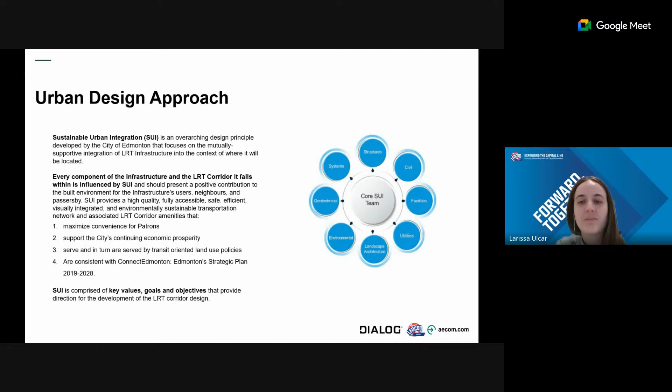You might have heard this term in industry before, maybe not, but Sustainable Urban Integration, or SUI, is an overarching contractual design principle that helps guide all design and construction decisions on this project. It was developed by the City of Edmonton in 2012, and quite simply put, SUI reimagines traditional transit design. Instead of focusing solely on function, getting passengers A to B as fast as we can, SUI allows us to shift conversations and elevate the importance of considerations such as environmental preservation, neighborhood and pedestrian-friendly design, placemaking, passenger comfort and safety, as well as transit-oriented design.

You might have seen in the submission contents that SUI can be further broken down into 4 key values, the first of which is pedestrians first. Although it's not limited to just passengers or users of the LRT system, it's important that the corridor and infrastructure contribute to a multimodal way of life for all users. The second is sustainable; we're striving to minimize the impact of the new infrastructure on its surrounding environment. Third, we've got flexible and adaptable, recognizing future short-term and long-term potential influences and their impacts and implications. Lastly, we have integrated: we're committed to providing a seamless environment where all components are designed and located to support cohesive, holistic design intent while allowing for unencumbered access of the corridor. Each of these values can be broken down into more tangible, interconnected goals and objectives.

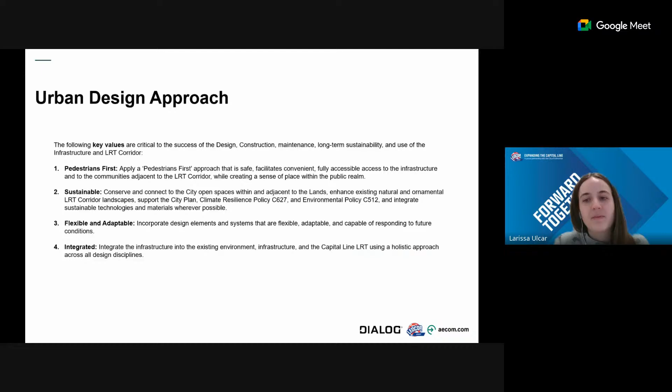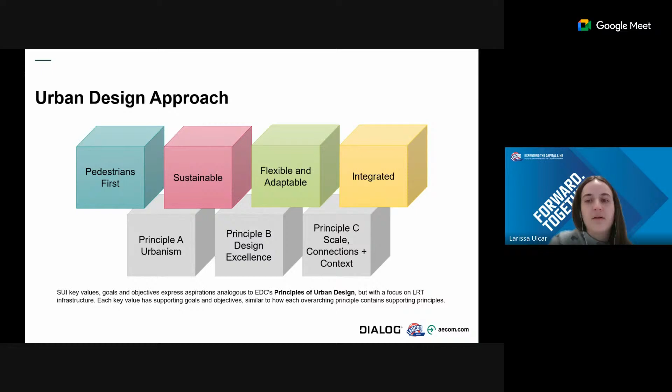We believe there are a lot of synergies between Sustainable Urban Integration and EDC's principles of urban design. The 4 key values can be broken down into 6 goals and further into objectives. Urban design has 3 overarching principles and 11 supporting principles. The key difference is that SUI allows us to tailor conversations and focus on LRT corridors and infrastructure.

The LRT corridor is the first real topic of today's presentation. The intent is to focus on the transportation network and connectivity along the multimodal corridor. We plan to get more into the details of SUI and user experiences, including character zones and pedestrian priority zones, in our 5th and final formal presentation to EDC.

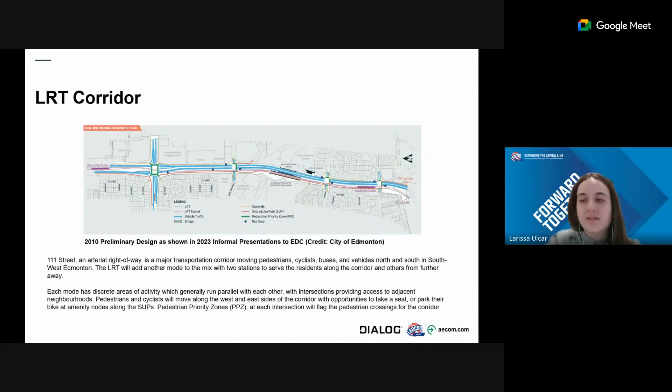Big picture, the majority of the alignment you see here is along 111th Street. The LRT will run in a dedicated or segregated corridor that parallels a lot of the other modes you see. For the most part, we are maintaining the existing vehicular traffic configuration, both in numbers as well as the pedestrian and cyclist movements.

If you couldn't see anything on that previous screen, we thought we'd zoom in a bit to allow everybody to appreciate some of the details. Just keep in mind where you see that north arrow pointing, because the orientation does change. Right now, north is to the left.

Starting with LRT, shown here in purple, we tie into the Century Park Station at grade, within the median between the two roadways. We actually use the 23rd Avenue underpass that travels below the 23rd Avenue intersection to skew the LRT diagonally so it can transition to the west side of 111th Street.

All the SUP connections on the maps are shown in orange. We're going to tie into the existing network along the west side of 111th Street. There's an existing pedestrian bridge connection to Century Park Station that we're closely tying into. SUP users will have to cross 23rd Avenue at grade and continue their journey south of the intersection, where they'll be between the tracks and the existing property fences. Sidewalk connections are limited to the east side of the intersections and roadways, mimicking a lot of the existing conditions you see today.

Heading a little further south, the LRT surfaces again around 20th Avenue, where we run at grade along the west side of 111th Street, with the exception of Blackmud Creek Ravine, where we have to elevate. The SUP, as I mentioned, is again on the west side of the tracks, up until the south side of Saddleback Road and 19th Avenue intersection.

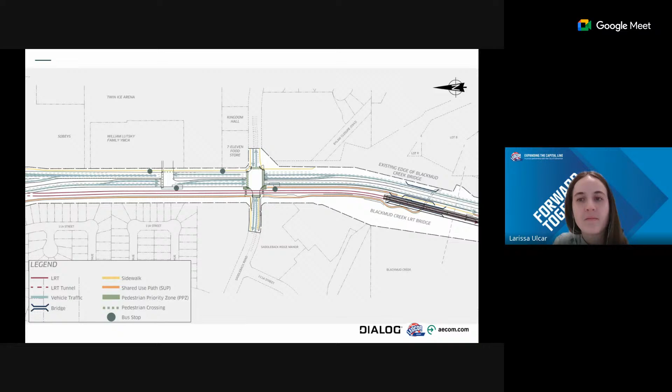South of Blackmud Creek, the LRT continues again at grade along the west side of 111th Street. This is where we have our first station, Twin Brooks Station, just north of 9th Avenue. The SUP continues between that roadway and trackway configuration up until 9th Avenue, at which point users will have to cross 111th Street and continue south along the east side of the roadway, allowing them to use the existing roadway bridge over Anthony Henday Drive.

The sidewalk here is quite disrupted in some ways, where we just have east-west movements at the intersections themselves, but that is similar to the existing condition. There's no connection between 12th Avenue and 9th Avenue. I will highlight one improvement we've made as part of maintaining two lanes of traffic and not adding a third lane: we were able to add pedestrian crossings at both 12th Avenue and 9th Avenue along the north sides of these intersections. Previously, we actually just had a south pedestrian crossing in those areas.

Now we're in the less exciting part of the alignment. South of 9th Avenue, the LRT starts to skew to the west as we approach the Transportation Utility Corridor and Anthony Henday Drive. We'll slowly gain elevation through the space, allowing the bridge to cross over Anthony Henday diagonally. This structure is dedicated to LRT; there are no pedestrians through this section. South of the Anthony Henday Drive roadway lanes, we start to transition down and skew west, and the roadway will pass below.

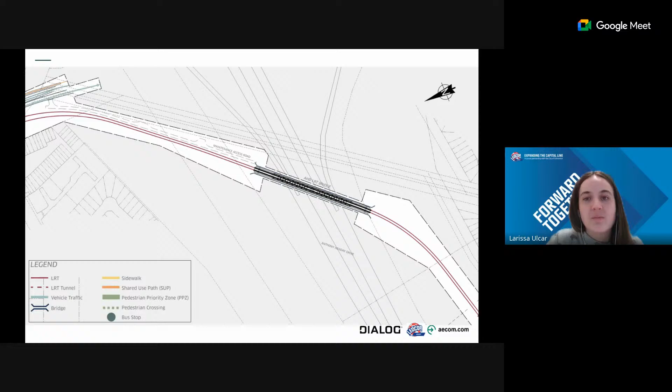Further west of there, we continue with the tracks at grade north of the MacEwan neighborhood, and we start to bend the track south. There is a point at which the track can split into two, allowing trains to enter the Lou Lawrence Operations and Maintenance Facility site, whereas the mainline track continues along the west side of that facility and ultimately brings us to the new terminus of the Capital Line, at Heritage Valley, on the north side of Ellerslie Road.

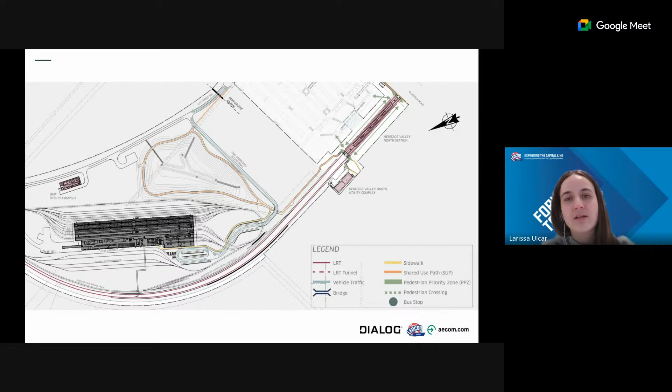The tracks will actually stop a little bit short of there, north of the existing east-west SUP. Folks will enter the Heritage Valley North Station from both the north and south sides of the station. It's a center loading platform. We've got a couple of little SUP connections to allow transfers from the Heritage Valley area to the Lou Lawrence Operations and Maintenance Facility site. There's a storm pond path and then some sidewalk connections to that building. Ultimately, this will be the terminus and will allow for a multimodal corridor hub, enabling transfers with the bus transit center and the park and ride.

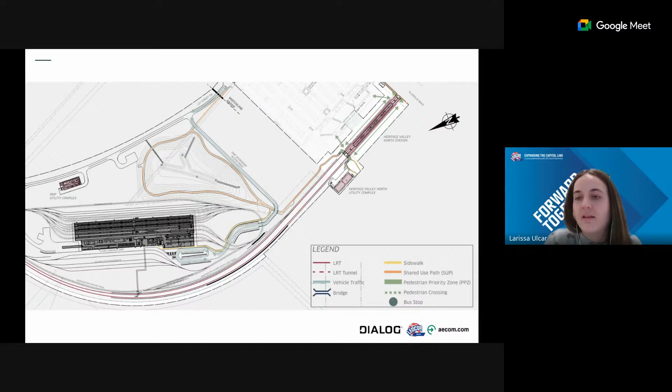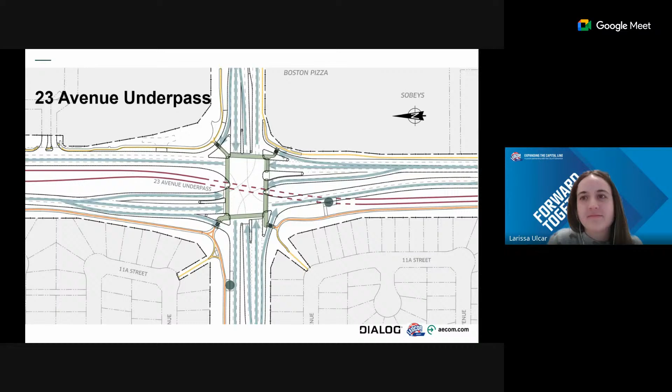So I'll be going through the major transportation structures on the project today. For the first one, the 23rd Avenue underpass, we'll start at the north end of our LRT corridor here, just south of the existing Century Park Station. This is a plan view of the 111th Street and 23rd Avenue roadway intersection. You can see the track alignment shown in purple, and north is facing to the left side of the page.

At this intersection, the city used the crossing assessment framework to determine that grade separation of that LRT alignment, shown in purple, would be necessary. So basically, in the dotted line portion there, the LRT crosses under 23rd Avenue and is buried underneath the intersection. What's beneficial about that is the new underpass will allow vehicles, pedestrians, and cyclists to use the reconstructed intersection in a very similar fashion to the existing, pre-construction condition.

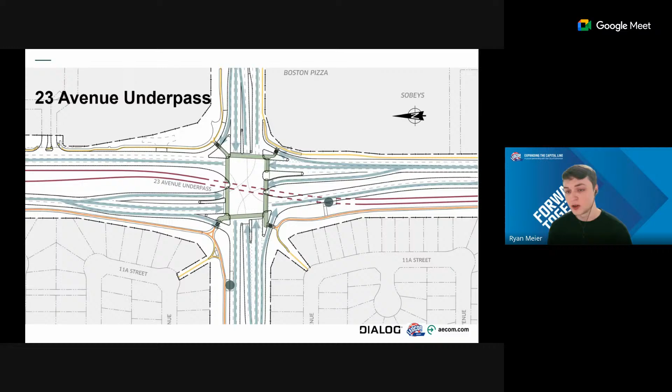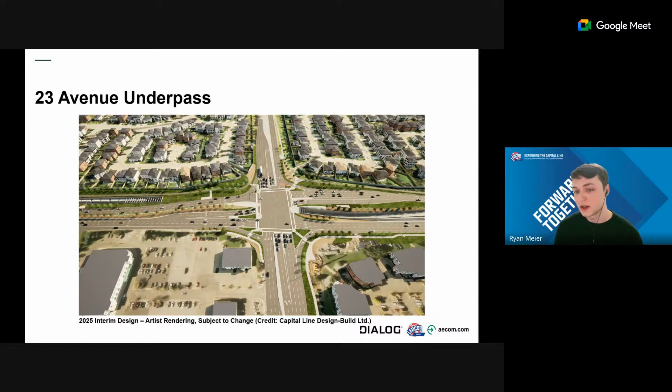So we'll jump into a bit more detail here. This is a rendering of that same intersection, this time with the page flipped, so North and Century Park are on the right side. What we're looking at is a bird's eye view of the intersection. You can really see the open air portal sections on either end, where the LRT transitions from at grade to below grade underneath the intersection. Between those portal sections is the underpass or tunnel portion of the structure, buried beneath the intersection. As Larissa mentioned earlier, this structure shifts the LRT alignment from the median between the 111th Street roadway, where the Century Park Station is, to the west side of 111th Street, where it continues south along the corridor.

So jumping into a more detailed shot here, we're at the north portal this time. These two shots are looking south down the corridor and 111th Street. On the left side we have a bird's eye view, and on the right side a track level view, both looking south.

What you can see in the bird's eye view is the 111th Street roadway on either side. Users driving by this structure will generally see a concrete crash resistant barrier and then the portal fencing on top. The portals rely on concrete struts at the deepest sections right before the underpass starts, providing lateral stability for the structure. On top of that concrete crash barrier we have black Omega fencing, to protect the opening and prevent any fall hazards.

Looking at the image on the right, we're down at track level now. Primarily we have cast in place concrete finishes, with a bit of an exception: durable fire rated insulated facing panels shown there, a little shiny in the image. The exact finish and color is still a work in progress, but these are provided to insulate the structural secant pile walls and provide a uniform finish for users on the train. We're focused on making sure the finish we pick integrates with the surroundings and provides clean, simple lines and seamless transitions between the different materials used here.

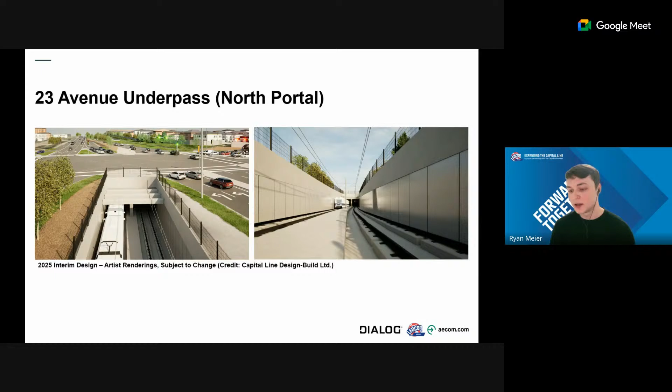Jumping over to the south portal, this is obviously the south side. Now we're looking north down 111th Street and back towards Century Park. Track level view on the left, bird's eye view on the right.

What you can see generally with the south portal is there's a lot more struts, because the transition back to grade is a little more gradual, so that deeper section in the portal exists for longer. It's a little difficult to tell in the image on the left, it's kind of dark, but you can see there is a central wall in the underpass that separates the northbound and southbound tracks. That's a cast in place concrete wall.

Back to the right side, now we're looking at that bird's eye again. You can see the reconstructed shared use path on the west side of the south portal, and the 111th Street roadway on the east side. On that SUP on the west side we are going to have ornamental landscaping and increased pedestrian lighting, which will increase and improve the user experience there. We're using that same Omega fencing shown on the north portal in black.

One thing we are looking at in collaboration with the city and the Edmonton Arts Council is to potentially use that Omega fencing as a public art opportunity and affix some public art there, as it'll be highly visible to people walking by this structure.

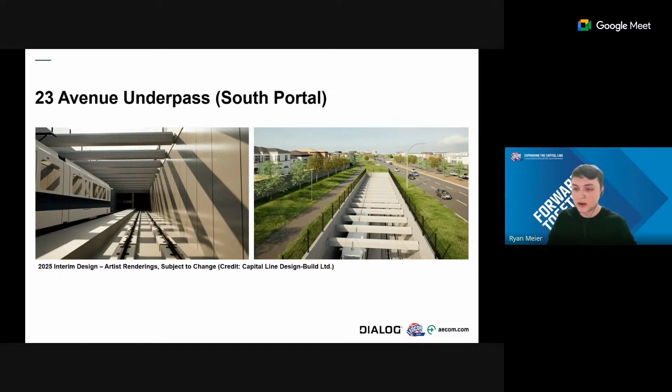So again, heading south down the corridor as we showed earlier, this is the Blackmud Creek LRT bridge, located over the existing Blackmud Creek ravine, approximately halfway between 12th Avenue and 19th Avenue, which is Saddleback Road, just south of the YMCA there.

What we have here are multiple spans over the Blackmud Creek ravine. We are maintaining SUP access below the bridge on the east side of 111th Street, so no reconstruction there. We're reconstructing the SUP, as Larissa mentioned earlier, on the west side of the new LRT bridge and tying into the existing SUP in the ravine. So not too much change for users there. This bridge is going to be offset approximately 5 meters from the existing 111th Street roadway bridge.

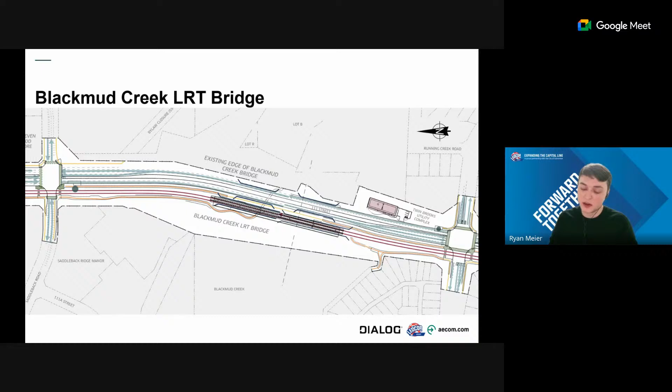Generally we have unpainted concrete finishes for more of a natural look, consistent with other recently constructed LRTs in the city. We have galvanized steel railing on both sides of the deck, to protect LRT maintenance staff. As mentioned earlier, this is a dedicated LRT structure, so no pedestrian activity crossing this bridge. The piers themselves are going to be very similar in size, shape, and finish to those existing piers on the 111th Street roadway bridges.

On the bridge, there's overhead catenary poles, no dedicated light poles on the LRT bridge. So we'll be making some slight modifications to the light poles on the roadway bridge, putting a double davit head on there to provide the trackway illumination required for the LRT structure.

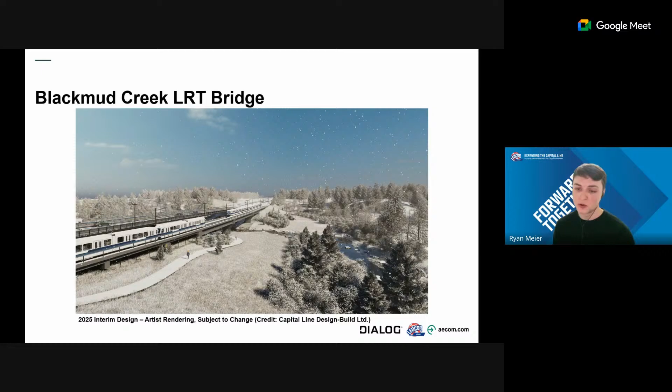Edmonton's obviously a winter city, so here's just a visual of what the structure might look like during some of the more cold months of the year. Really just trying to showcase what some of those finishes might look like in the winter there.

Moving south to our third and final transportation structure, this is the Anthony Henday Drive LRT bridge. Again, a dedicated LRT structure, so no provisions for general pedestrian access across the LRT right-of-way. Within the TUC and Anthony Henday Drive area, we're positioned west of the existing 111th Street roadway bridge, which isn't shown on this plan but is just to the east there. We're crossing the Anthony Henday Drive at a skew of approximately 50 degrees, so not coming across the highway perpendicular, but crossing at a skew.

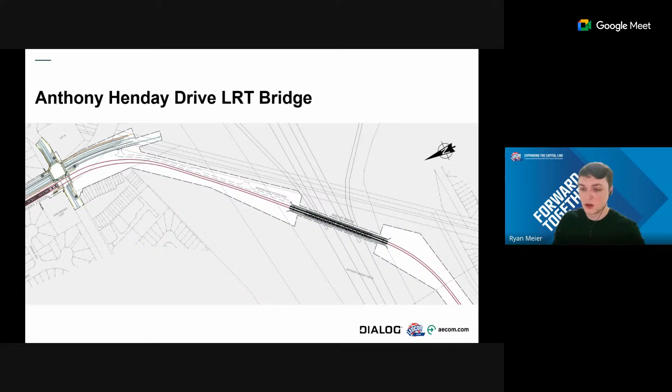So looking at a more detailed visual of what this signature structure might look like. We're traveling eastbound on Anthony Henday Drive here. You can see in the background the existing 111th Street roadway bridge, and in the foreground this is our new LRT structure. It's a combination of concrete and steel materials.

We'll start with the piers and the approach structures. We're using cast-in-place concrete, which will again be unpainted for that natural finish. The main spans, the main white spans over Anthony Henday Drive, are twin network arch spans with inclined crossing cable hangers, one of the most effective structural designs for long spans. We have 83-meter spans on this bridge.

The superstructure itself limits the use of bolted connections in the design, and limits the use of concrete diaphragms, to provide clean, uninterrupted lines that are visually appealing to users and drivers. The structural steel and cable hangers are shop painted white to provide a uniform appearance. The exception is the steel underneath the bridge deck between the edge girders, generally in shadow, which will be unpainted weathering steel, because it's generally not going to be seen by road users traveling at high speeds along Henday, passing underneath this structure.

Again, galvanized railing on either side of the deck for maintenance only, consistent with the Blackmud Creek Bridge, more of an OH&S compliant railing. And we're still working to develop a low-level lighting design for this structure to provide the 10 lux requirement for the LRT tracks and the train operators.

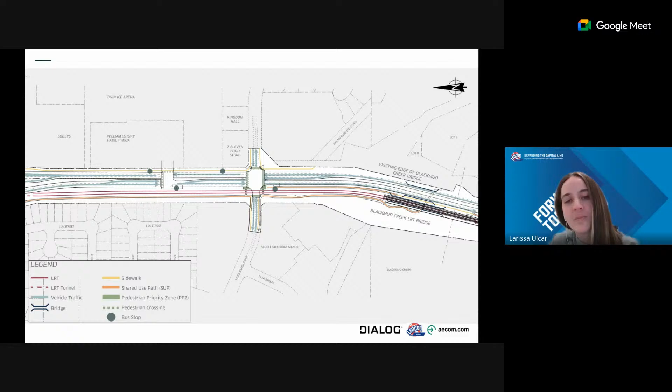No problem. I know this came up last time at EDC, regarding the Twin Brooks Station and its situation so close to 9th Avenue. I know it was brought up last time, if there was an opportunity to shift that further north away from the intersection, so it could provide a better interface with that intersection and a better connection to 9th Avenue. I don't know if that was looked at any further after last time. It was a good number of years ago that this was here.

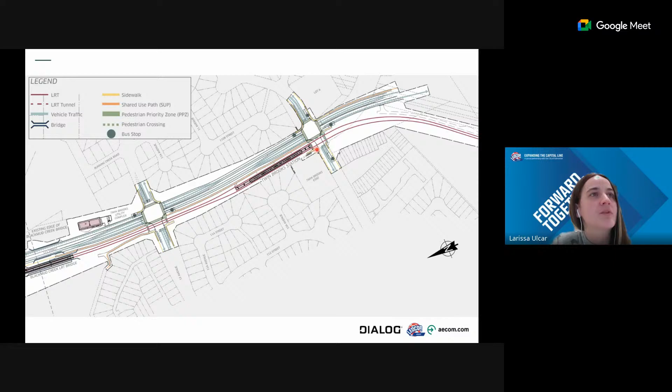Yeah, now because of the SUP shifting, we also have a bit more space now on that back side. But ETS always requires parking to service the stations, so there is a bit of this area we haven't fully designed and developed just yet. It's again maintenance of any landscaping back here, we want to be mindful of that. But if it's hard surface versus soft surface, I don't know if it'll be a true plaza, but yeah.

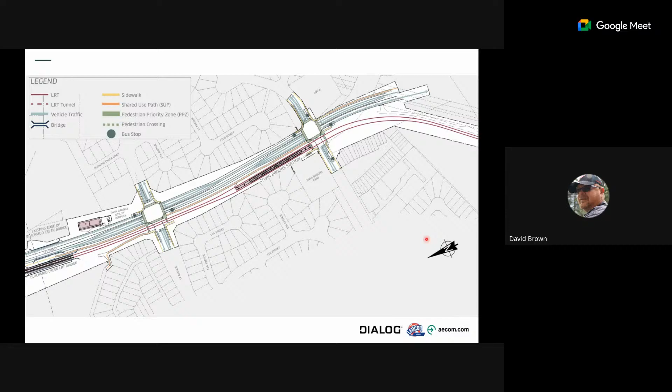Well, you know what I'm saying is that most of the stations that have gone in have some public realm definition, and even adjacent business owners have contributed to some of that. I know because I'm working on Bonnie Doon, so there's a transit plaza that we've connected to that station, and so on and so forth. As I said, maybe there's some discussion that can go on with the owner to still provide those operational requirements, but really establish a strong pedestrian realm that relates to establishing those character zones that you guys talk about in the document. So anyway, that's all I have.

Thank you. Yeah, no, thank you, David. Thanks, David. Nick?

Thanks, Craig, and thanks for the presentation. A lot of the comments I think I'll probably reiterate.

It's good actually to see the trail on Twin Brooks Station being relocated. And going back to David, I think that gas station will probably have to sell anyway, because it's probably going to run out of business, and probably a good opportunity for some infill in there.

But anyway, separate from the subject matter, overall, I live in this area, so I know it pretty well. I'm in Twin Brooks, so it's going to be interesting to see how you get emergency vehicles with the 2 gates going down at the same time on 2 roads in and out. I'm interested to see how that functions.

But overall, I think it's great, fantastic to see this happening. My main concern is probably around Black Mud Creek and the bridge going over — I really have concern about that fencing. There's already issues in the river valley there.

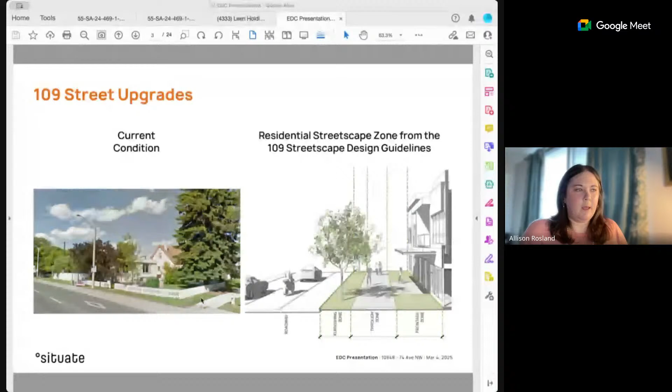The site is 494 square meters in size and is currently zoned RMH 16, the medium scale residential zone, which allows for buildings up to 4 stories. The RM zone allows for a variety of housing types, including small scale residential as proposed in this development.

The proposed development consists of 5 3-story, 3-bedroom row houses, each with a 1-bedroom secondary suite, for a total of 10 units. Each row house has a total floor area of 1,305 square feet. The secondary suites on each end have a floor area of 500 square feet, and the interior secondary suites have a floor area of 516 square feet. The building height is 11.3 meters.

City policy encourages active transportation modes and transit use. So for this project, on-site vehicle parking is not provided, with the aim to attract residents who use these transportation modes and do not rely primarily on personal vehicles. That said, the site is within the Communauto car share area, which would provide residents additional options for vehicular transportation when needed.

The project is designed to integrate well within the existing neighborhood, providing a gentle increase in density and building height that respects the existing urban fabric of the surrounding low-density, ground-oriented residential area. Queen Alexandra is a well-established neighborhood experiencing gradual redevelopment, but less than 1% of dwellings were row housing in 2016, the latest municipal census data available. This project will help improve housing diversity in the area.

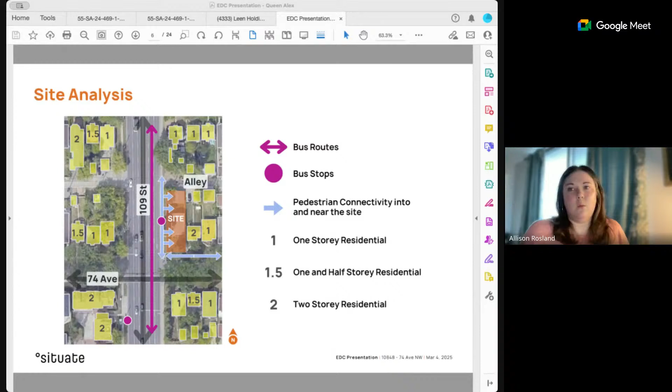As I mentioned, the site is also well connected to the transit system. There's a northbound bus stop approximately halfway along the site, and a southbound bus stop across 109th Street, slightly south of 74th Avenue, within easy walking distance of the site.

As you can see on the site plan, the units face 109th Street with ground-oriented entryways. Balconies for the row houses on the main floor and ground-level patios for the secondary suites provide amenity areas, enhance the ground-oriented features of the homes, and provide a transition from the building to the public realm, helping create a people-friendly street. The site plan also shows the proposed 109th Street public realm improvements, including a green boulevard, relocation and a wider 2.5-meter sidewalk, and the relocated bus stop and amenity pad.

Looking at the landscape plan, new trees and shrubs are primarily along the sides of the buildings. The new landscaping on the south side enhances the public realm along 74th Avenue by providing a buffer from the building and visual interest along the side of the building.

On the north side of the site, the landscaping helps screen the waste collection area for pedestrians walking along 109th Street. A row of shrubs along the edge of the ground-level patio provides a natural definition of the area while providing a soft transition to the public realm and creating a green connection to the boulevard.

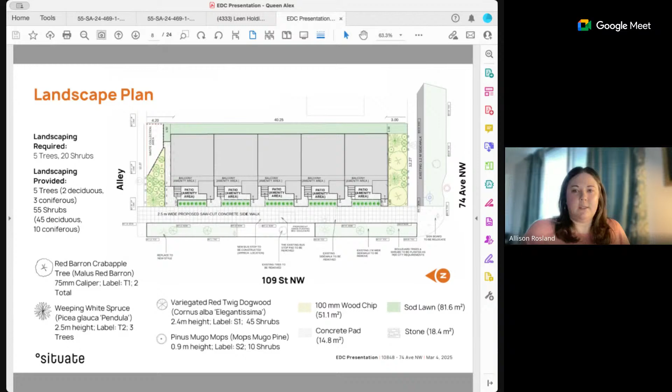In summary, the landscaping plan prioritizes greening the areas of the site adjacent to the streets, thereby enhancing the public realm. The building was designed with an active frontage with street-facing windows and doors. Variations in facade depth, material changes, and articulation around the windows and row house entrances provide visual interest, breaking down the massing to fit within the existing urban fabric.

Large triple pane windows provide energy efficiency and lots of natural light. Facade materials in light and dark colors create definition and visual interest.

Balconies on the main floor, the third floor, and the patios provide outdoor spaces for residents and enhance the urban streetscape experience. The entrances and balconies are recessed, which provides protection from Edmonton's winter weather. The covered entrances on the main floor balconies provide further protection from the weather elements and help define the entrances, while maintaining open sight lines that provide safety and connection to the public realm.

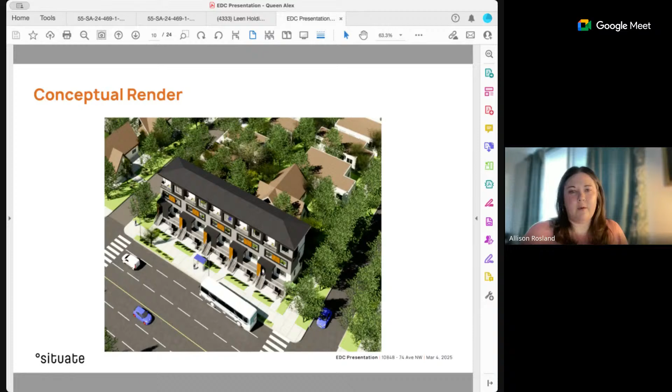This render shows a slightly different view of the building. It highlights the ground-oriented entrances and amenity areas fronting onto 109th Street and the defined pedestrian connections to the city sidewalk that provide a transition to the public realm and help create a people-friendly street.

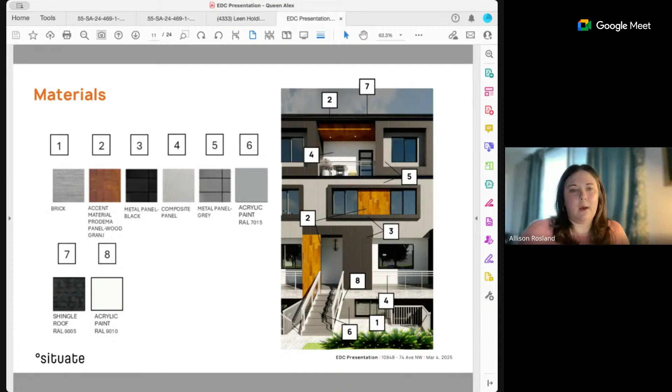The building design integrates durable and low-maintenance materials to prolong longevity of the building. The material palette was chosen to provide a contemporary but timeless appearance. Metal paneling on the facade provides durability, and the black accents around the windows and entrances provide contrast from the primary gray color. Natural materials, including wood and brick, bring warmth and contrast to the building design. Glass railings on the balcony allow light onto the balconies and provide an open and modern aesthetic.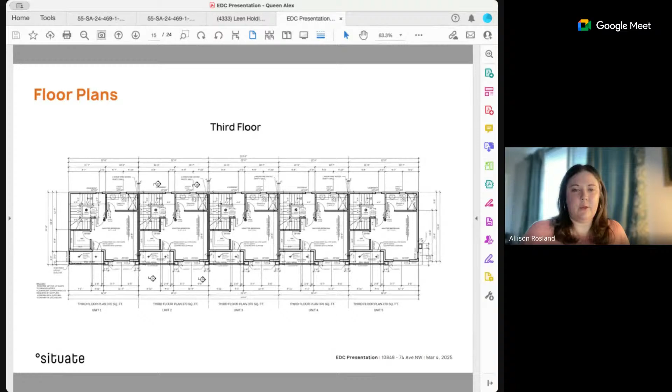The main floor, which is shown here, features an open concept kitchen and living area and a powder room. On the second floor, there's 2 bedrooms and a bathroom. And lastly, the master bedroom with an ensuite and private balcony is located on the 3rd floor.

The next few slides show the building elevations. As I mentioned earlier, the facade articulation provides visual breaks and interest along the building wall. Large windows provide natural light, and the main floor is elevated by approximately 1.4 meters, which allows for more light into the secondary suites.

Windows along the back of the building provide light into the kitchen and the bedrooms on the upper stories. By locating the amenity areas along 109th Street, there will be less noise impacts and additional privacy for the neighboring property to the east.

The facade continues around the corner of the building, which provides continuity from the front and reinforces articulation rather than a blank wall. Windows on the north and south sides of the building provide additional natural light for the end units.

On the front of the building facing 109th Street, pedestrian scaled lights are provided by each row house and secondary suite entrance to provide light for safety and ambiance in the adjacent public realm. Pot lights above the 3rd floor balcony further contribute to the ambiance, and the use of downward oriented lighting reduces light pollution.

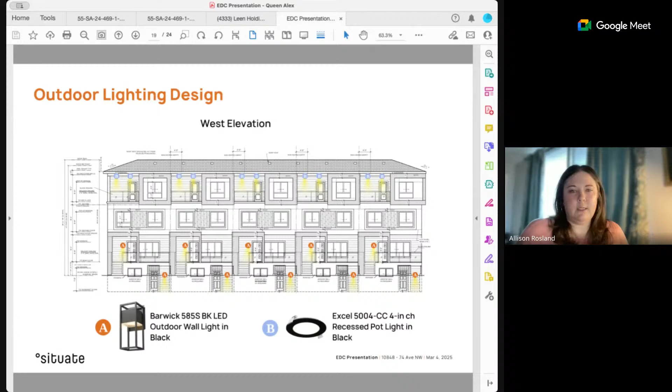Although there are no entrances on the south side of the building, lighting is also provided here to enhance the public realm along 74th Avenue. And on the north side of the building, lighting is provided for the waste collection area, as well as to provide ambiance.

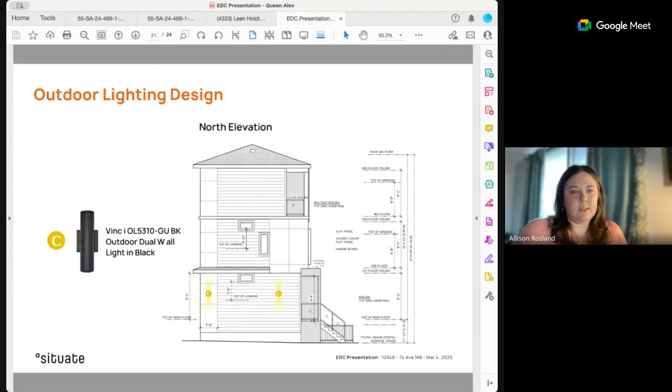As I start to wrap up the presentation, I want to circle back to the 109th Street improvements and the site's interaction with the public realm. 109th Street is a key secondary corridor, and this project enhances its pedestrian experience.

The cross-section illustrates that the site layout prioritizes pedestrian connectivity and a transition to the public realm. The ground-oriented entrances, main floor balconies, and ground-level patios are human-scaled. The amenity areas and the entrances have lighting that provide ambiance and safety.

In the streetscape, improvements will improve walkability and enhance the public realm with a wider sidewalk, green boulevard, and pedestrian-oriented lighting.

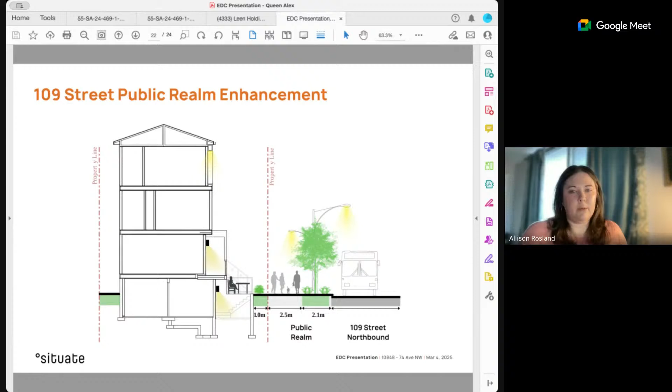So in summary, the project aligns with the urban design principles because it aligns with city plan and district policy goals to provide density and housing diversity in a well-connected location. It strengthens the neighborhood by delivering high-quality, family-oriented housing.

It has connectivity to the transit system and cycling infrastructure. It supports walkability by providing homes within walking distance of parks, schools, and amenities. It allows for a small incremental change that fits within the fabric of the community. It has human scale design with ground level entrances, balconies, and patios oriented towards 109th Street that create an active and inviting streetscape. It encourages sustainable and efficient land use by replacing a single house with 10 new homes, thereby utilizing existing infrastructure.

And it incorporates energy efficient materials, and creates a transit oriented development. And lastly, it integrates with and enhances the public realm along 109th Street.

Thank you for your time, and we're happy to answer any questions.

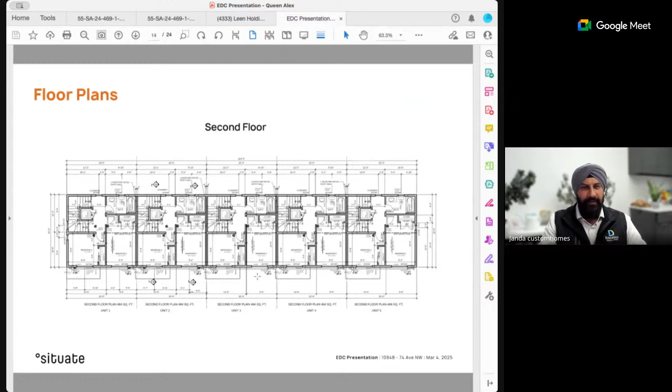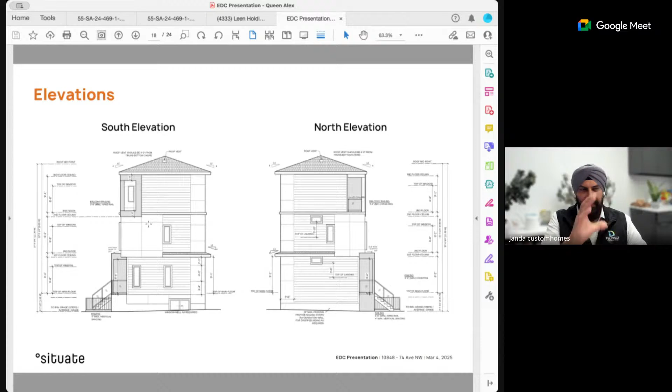Can you go back to that elevation, Allison? This is exactly the south elevation right there. So maybe we can do a little bit more there on materials, so it doesn't seem like an end cap to the front of the building.

Maybe - I guess I look at the end cap as being of the block. So if you go to the other elevation, the east elevation, the full left unit, or at least two-thirds of that full left unit, is kind of what you see when you walk down 74th Avenue from east to west. That's kind of how I see this building shooting out. It'd just be nicer if it tied a little better with 74th Avenue, or in relationship to the setbacks of the homes there. They're all quite setback, but I don't have an answer for you of how you'd do it right now, because it does appear to be a significant move to the building in general. But if there was a way to get the entrance there, and maybe consider wrapping the materiality or concept more on this side, then it won't feel like you've hit the blank end of the building, right adjacent to the home in its front yard.

Yeah. And I guess my final comment would be, when I look at the material palette, I wonder if you have too many materials in your palette. I look at it, and you've got 5 different pieces kind of going on. When I look at the consideration of the brick, it seems to be in a strange place, almost like a border of your patio, when usually those materials are a little more grounded. Or where you've got number 6, I would have expected the brick to start there and continue on if the brick were to be used, or vice versa. But I guess that's just more of a comment than anything. I'll leave it at that and let my colleagues provide their input.

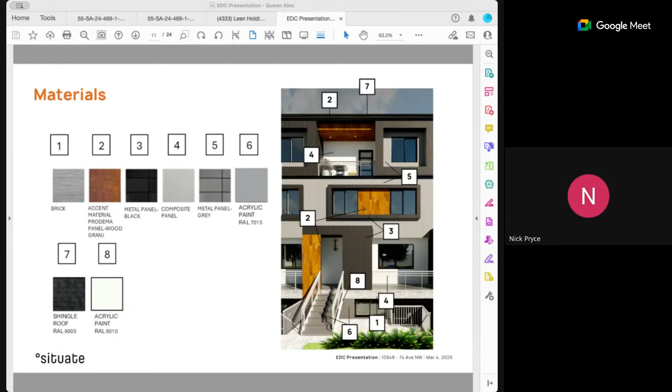Thanks for that, Mindy. We'll go to Nick. Thanks, Allison, for your presentation. I'll just mirror what Greg was saying about the end that he's speaking to—I think there's something that could be done in terms of the interface with 74th. It looks like the architect probably has some design solutions there.

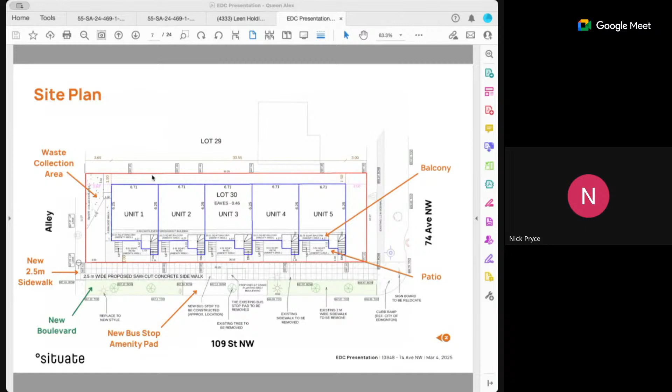The only other thing I'm curious about is the distance from the house to the blended area. I know we're transitioning here, but it looks pretty close to the house to the east. Your images showed a correlation, but didn't really show that interface. From an urban design point of view, I think we're going through part of that transition where there's single-family and we're starting to do infill, and some of the rules have changed, but it's important to look at what that interface is, because the house looks pretty close to me.

Yeah, it is built to be, because the building height is less than 12 meters. The setback is 1.5 meters from the interior property line. So it is closer than it would be if we were building, say, a 4-story building under the RM zone or the RM h16 zone.

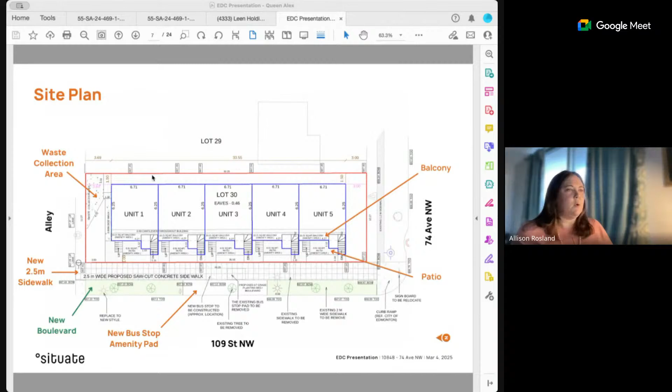So your comment is more about the design of the back of the building, how it interfaces with the adjacent property. That's pretty much where I was going, because that's where it gets a little blankish—whether you could use tactile elements to separate it up a bit in terms of individuality of the units without putting too much expense into it. There's not that many windows and elements, but it is a bit of a blank canvas on the back. That's where I was going.

Maybe think about some elements you could do in your palette along that elevation just to break up the massing of the building. I'm wondering if there are some minor things we could do on the facade to create some articulation without drastically changing the design, just to create a bit more visual interest.

Yeah, I do see what you mean, it feels like a wall, right? So if we can get some materiality, I think you could use it to break up the form—even showing it as independent, whether it's a line down the center or something. Not too excessive, but just adds a bit of variation and shows it's not one solid block. So that would be my main comment.

But otherwise, I think it's great. It'll be interesting—I hope these work well given where it's at. It's going with where I think the plan was meant to go, so good on you. Thank you, that's really my main comment. Thanks for that, Nick.

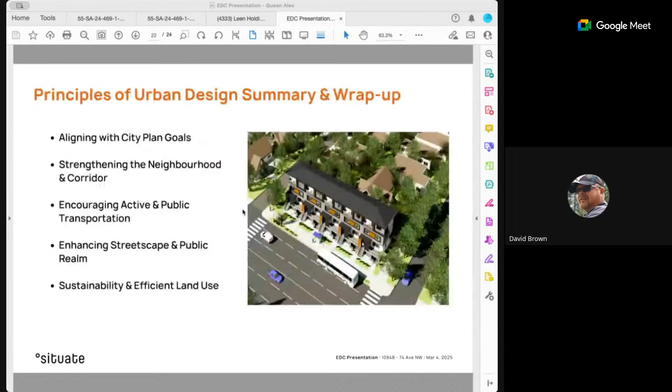But the question I had was, has there been any consideration of establishing more of a raised seating wall planter bed there, and adding a gate access to better define the patio amenity areas and also the upper and lower stair entries? That would also create a privately enclosed space and enhance the interface with the public realm. And Allison, you sort of said it yourself, it would stop people from walking across the shrub bed, because that's exactly what's going to happen no matter how wide or narrow you make that walkway.

But to add that, just a 450 mil sort of planter in there and a gate creates much more of a private space for the resident. And then it sort of provides a better definition between that space and the street, especially now that you're adding a 2.5 meter walkway and boulevard there and so on and so forth. So it'd be something to consider.

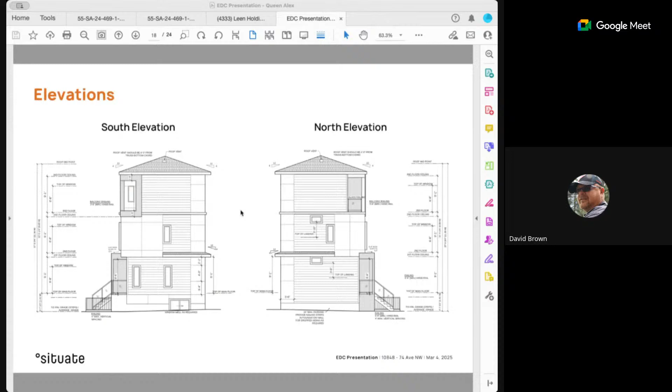I'm not so hung up about the unit facing 74th Ave, but maybe there's an opportunity to create a better connection to the neighborhood and the public realm by adding some additional private public amenity space along there.

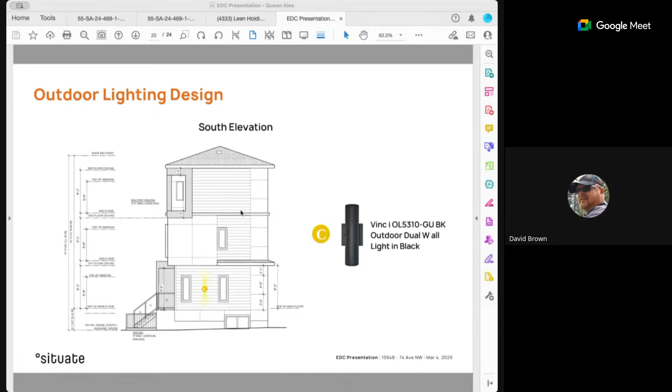So it provides the opportunity to maybe screen some of that south elevation with more trees and maybe a community garden sort of space, so that it addresses the neighborhood transition from 109th Street down 74th Avenue into the neighborhood. So that might be something you could consider.

And then I'm still a little lost. I'm a landscape architect, so my last question deals with the landscape. I tend to disagree with your comments about how the soft landscape, I don't see how the design and the species are enhancing the development. So I'm not really too sure what the intent was around the landscape.

I think there could be more opportunity to look at year-round form, massing, accents, textures and colors that better enhance the overall development and create different types of spaces around the building. So I'm not really too sure what the intent was. A lot of people don't spend a lot of time on the planting design, and it can really make or break a development like this, especially one so prominently situated along 109th Street.

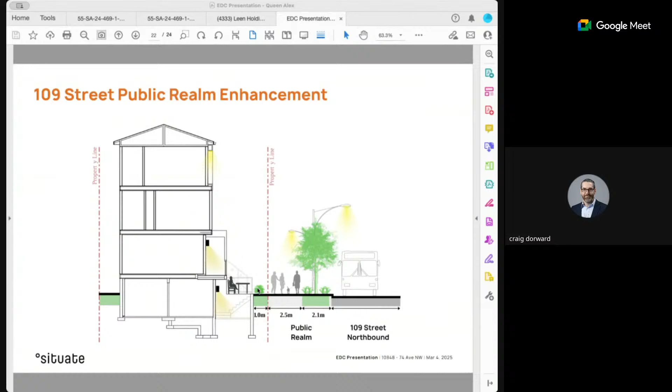My only thought is because that bus stop is right there, you'll have people congregating. Maybe an idea, since you talked about shortening that planter with one plant on each end—if that's an amenity area for the lower suite, maybe it can block off the stairs so they lose the direct connection to the sidewalk, and you snake them through the other end of the amenity space. So it's just a slight rejig of where you're entering. Maybe block that stair off from direct access, and you have to meander through your own patio amenity area a little, with the gate alongside the stairs.

Just a thought. I do agree the south end of the building needs to relate a bit more to 74th. I don't know if a light does it. I like David's comment about a garden or something communal there. My only other thought would be perhaps the balcony can wrap around, giving it some activation and some massing along that south face.

Greg mentioned the back side, the east side. I realize that as this neighborhood transitions, the neighboring building to the east in its redeveloped form would probably push its front yard south as well to better align. But for the time being, it is a little bit of a blank wall facing east. That's about all I had. Overall, I think it's a good project.

Thank you. Thanks. Okay, thanks for that, Craig. We'll go to Karen. Hi there. Thanks for the presentation. Yay, density.

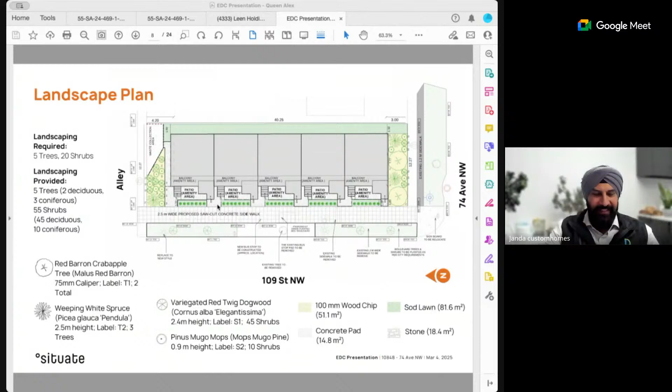Right? So something to consider, just that design consideration. Yeah, we'll think if there's some way we could accommodate some kind of storage area where those things could go. Amar, any thoughts on that? Yeah, I was just looking at that—the balcony we have in the front, is there a way to create a storage area there? Where there could be just a door, maybe on the opposite side of the entrance, and you can lock it from the outside or something. It doesn't have to be super large, just somewhere to store things without hauling them into the house, right next to the window. It might help your marketability as well.

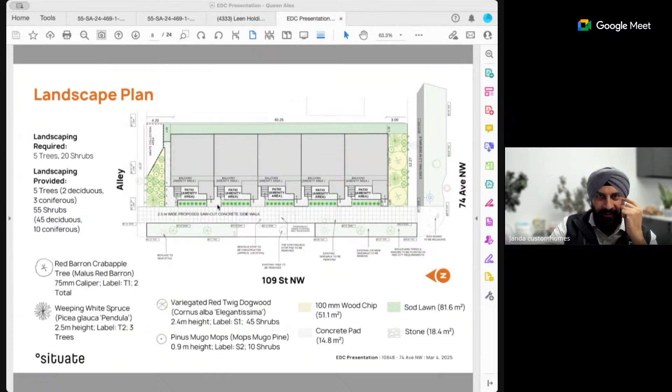For sure, yeah, a great point. Just a consideration for you. Yeah, we'll take that away and think if we can come up with some kind of solution. Alrighty, so that's it for me. Other than that blank wall at the back side, which I find rather imposing, but otherwise I think everything else has been said. So yeah, thanks, and yay density.

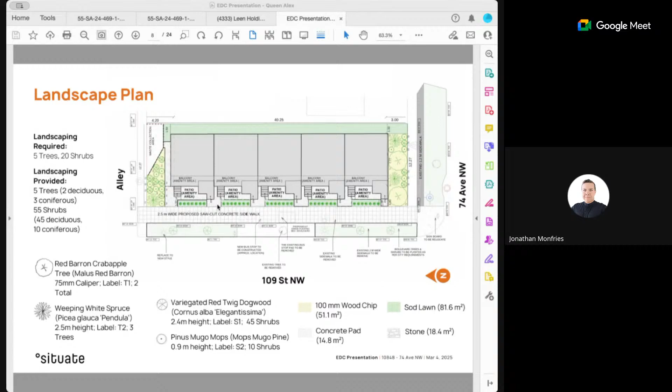I think one way to help with the overall massing feeling so imposing, like a straight extrusion, like a wall to the neighborhood or block, is to simply pull back some of the roof overhang over the balconies, so you can create a bit of a feature with those rectangular build outs around the window. From the pedestrian perspective you'd actually see a bit of articulation in the roof line, and you're not getting that much shading anyway from that overhang - it's such a narrow balcony. So if you pull back the roof line and emphasize those square bump outs where the windows are, it would create some articulation, some visual interest on that west elevation.

On the south, glazing is one option to improve the south elevation. I know the top level is a bedroom, and you already have a larger window on the west side, so it may not make sense to add another window. But I think that could just have another look.

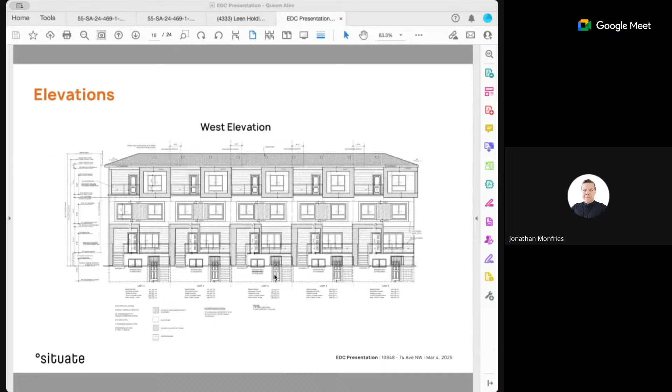On the rear of the building, I think there are ways - perhaps there needs to be at least two materials used here. The front or west elevation is quite busy with a variety of materials, but the east elevation we're looking at basically one material. I know there's some material wrapping around the corners, but perhaps you can alternate, more like a row housing development. Perhaps there could be some reveal lines or other bump outs of some sort.

Just knowing that this building is kind of a bookend on the block, I think it's important to understand that pedestrians and even people driving along 74th Ave - this is what they'll see almost the entire block, at least at this stage, they'll see the third floor of the building.

Aside from that, I love how the building engages with 109th Street. I think the amenity space for the basement being at grade is interesting, and a potential resident of that basement suite would be happy with that grade patio. So that's great. Just trying to find ways to do a better job of engaging 74th Avenue, and maybe some roof articulation so the mass isn't so imposing as a bookend on the block. Those are some of my comments.

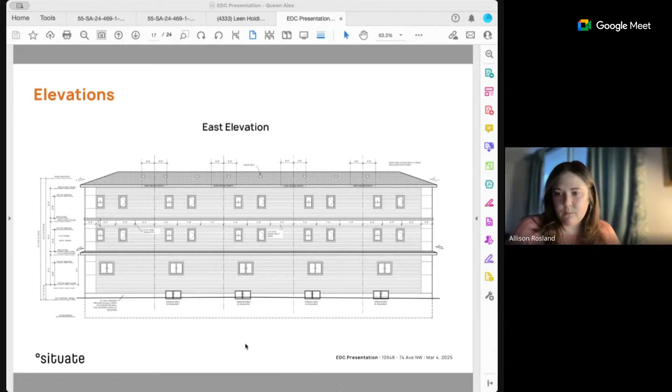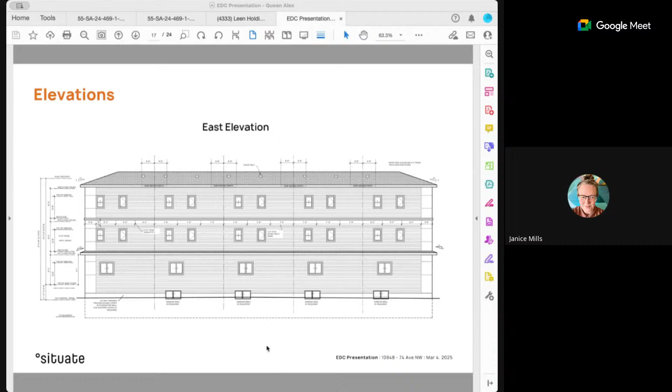I really would like to echo a comment I believe David made regarding consideration of a raised seating wall or planter at those balconies, and maybe playing off what Karen was talking about with potential bike storage or things like that. If that becomes a raised planter wall, if there was an ability to incorporate an anchor point that someone could potentially chain their bike to within their own balcony area, that would be a potential opportunity to at least give residents the chance to secure something within those areas.

Karen gave a thumbs up there. So I have 2 kids - I know what it's like to have stuff.

Similarly, I had the same kind of thoughts about that east blank wall. I just think some small moves there could definitely improve that visual now, especially before potential future developments to the east.

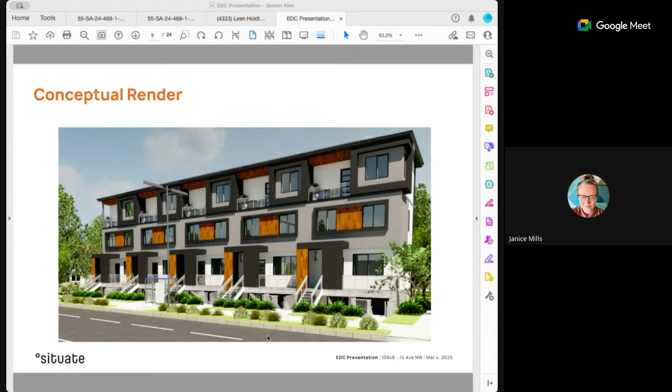It's okay, sounds good. So with that, I'll open it up to the committee. Thoughts, comments?

I heard some positive density. I think Nick, yeah, I think they're heading in the right direction. I think we all had most of the comments. I think David's done a pretty good job actually at getting most of them encapsulated here. So I'd put a motion of support forward based on the comments that are there. I think it's close, it just needs some refinement, but I would second it.